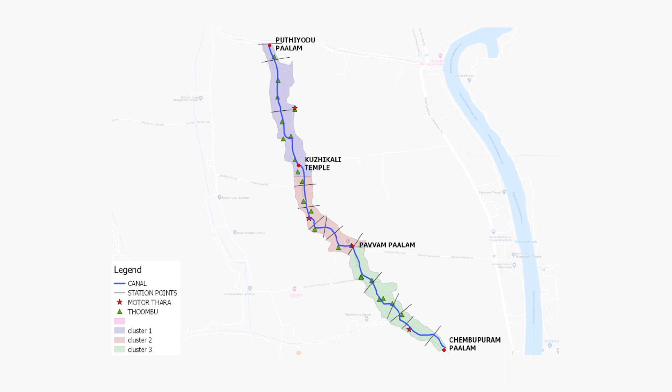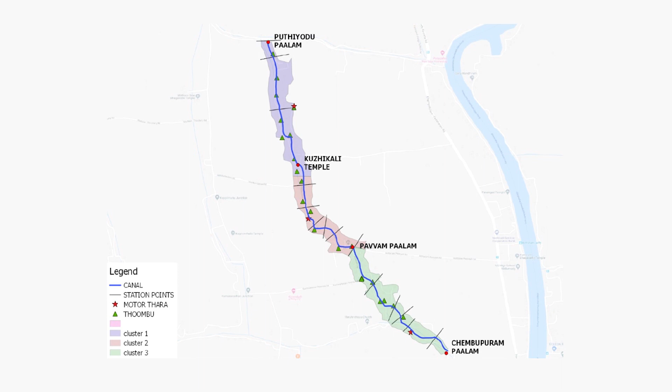So, we tried to clean a canal known as Pavvam Canal in Nirmadi Panchayat within a single day with people's participation, and then we tried to construct the compound wall surrounding the Kidake Thumbooram Padashekaram, which is of length 3.8 kilometers, using the debris, the clay, the deposits in the water bodies over there. So, those are case studies number 2 and 3, which are going to be discussed in this segment number 5. So, here we go.

First of all, we shall see the Pavvam Canal experiment. Pavvam Thoda or Pavvam Canal is a canal having a length of 2.5 kilometers, running through the Nirmadi Panchayat. It suffered from silting and encroachments. So, the canal is almost dead because of the silting. The flow of water through it is almost not there, and there were a lot of encroachments also.

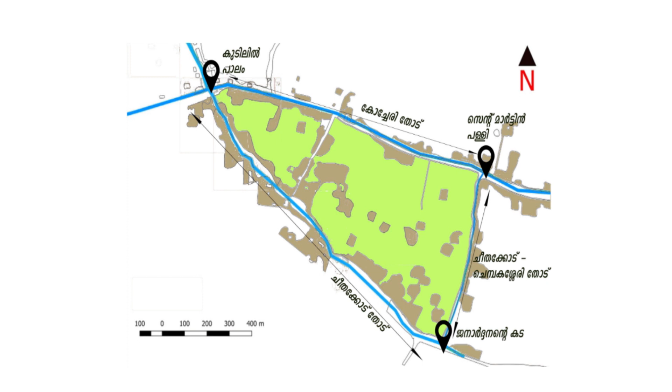You can see in green color the Padashekaram, the polders, the paddy fields, and surrounding the triangular polder you can see water bodies, shown in blue color in the diagram. In the water bodies there was silt deposit, somewhere the width of the water body was not sufficient, somewhere the flow was not there. So, a lot of problems were there. A lot of water weeds were there, so removal of water weeds was also an issue. So, a survey has been done in the water body surrounding this particular polder.

The measurements like width of the canal or the river, whatever is surrounding that, is taken. Depth of the water in the canals and depth of the siltation in the canal were also taken, following the methodology which was adopted in the Alappuzha Canal Rejuvenation Project.

So, this is exercised at every 25 meter interval; these measurements were taken, and the quantity of sludge to be removed was calculated, and this implementation has been handed over again to the irrigation department of the state. So, you can see the measurement, the numbers are given there.

135 acre was the extent of the paddy field of this Thumbooram Padashekaram. 3.5 kilometer was the length of the outer bund. 300 meters is the length of the inner bund. So, that is the quantity, and then the data collection process

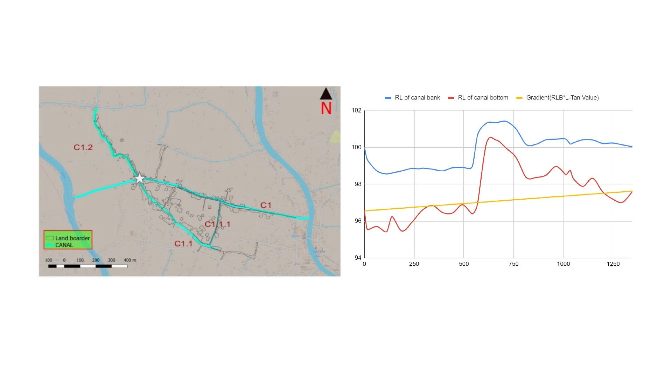So, this 3.3 lakhs cubic meter of sludge is made use of to strengthen the bunds. That is what is going to be discussed in the next slides. So, people participation was there, and community-driven agro enterprise also. So, these are all the associated aims of the project given there.

Now, how the Thumbooram project has been executed is what is being explained in these slides. Objectives: to collect soil samples and test for index properties of soil as well as CBR. So, these are some technical terms associated with civil engineering, because when you actually make a road or a foundation, for the soil below the foundation the index properties are required, like liquid limit, plastic limit, etc.

CBR is California bearing ratio, that is the full form of CBR. So, the CBR test is conducted in the laboratory using the disturbed soil collected from the site, and a higher value CBR indicates that the soil is good, a lower value CBR indicates that the soil is bad. So, that is how it can be interpreted.

So, what we have done is we have collected the samples from the site, and whatever soil is available from the site was tested for CBR, and we got a very low value for sure. And then we added coir geotextiles into that in a single layer and multiple layers, and then the CBR test was done again, and the result is given in the coming slides in detail.

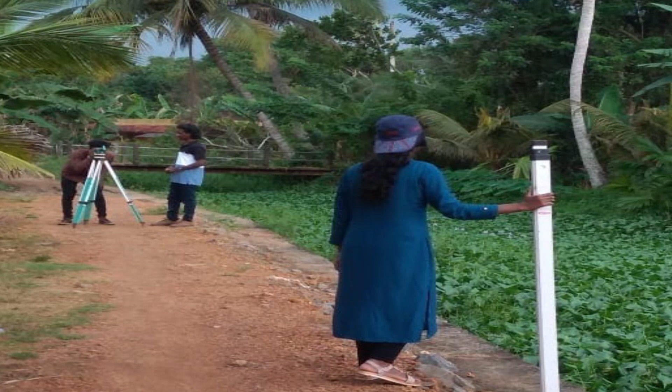So, from the data of the survey and the test results, to design suitable pavement using silt, clay and coir geotextiles based on gradation, based on density of the geotextiles and based on the CBR value. So, a methodology has been devised after reinforcing the clay available from the site using coir geotextiles. That is what is being explained.

To strengthen the existing bunds through the devised methodology, geotextiles and Cocolog. Cocolog is a product which is produced by the NCRMI, Thiruvananthapuram. So, there is a Coir Research Institute in Thiruvananthapuram, they are producing this Cocolog also, and these coir geotextiles are products of the Coir Board. So, they are available in plenty, and coir is also a product of Alappuzha for sure. So, it will be a promotion for that too. So, the coir geotextiles as well as the Cocolog.

Cocolog is actually a bundled shape of this coir geotextile, I would say. Like in the shape of a cylinder, they bundle it, and these bundles could be inserted into the driven poles. In between the bund and the driven poles, the Cocolog is inserted firmly, and they help growing of vegetation. Finally, after some time, after say 2 years or 3 years or 4 years, this Cocolog or the coir geotextile may peel off from the place, but the vegetation will grow there, and the roots of the vegetation will keep the soil firmly. That is a fine line, right.

So, after taking all those measurements and after conducting all those tests, the result is this. From the experimental results, it was observed that there was 53% of silt in the sample which is tested, 18% of clay and 29% of soil having higher gradation. So, silt, clay and other gradation soil particles were there in that mix of soil. It was inferred that the strengthening can be effected through compaction, right.

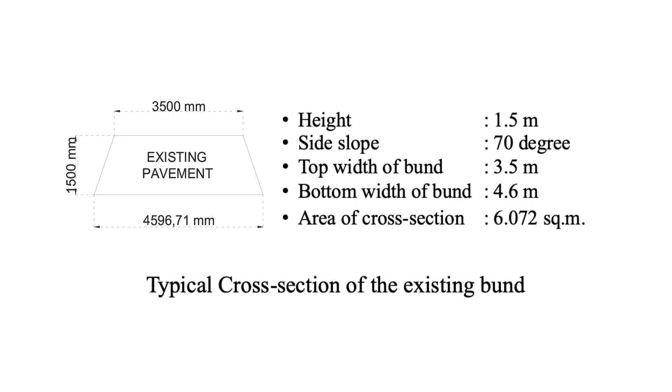And such kind of a typical existing bund is improvised in this manner. You can see the top width is maintained as 3.5 meters. The bottom width will increase because there is a side slope for sure. And coir geotextiles are going to be made use of to improvise this, and that is going to be explained in the coming slides onwards. So, if the bund which you see in the previous slide is to be improved, the improved bund looks like this.

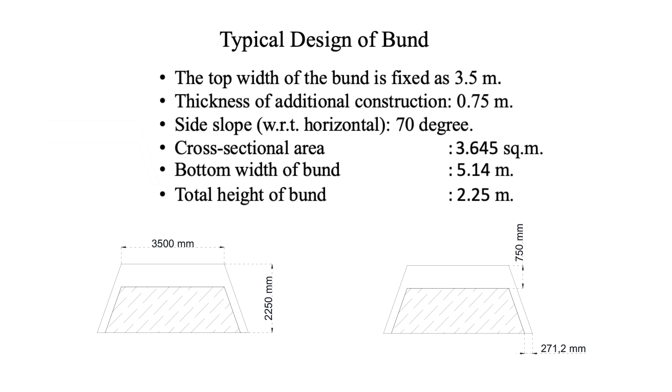The top width is 3.5 meters, thickness of additional clay is 0.75 meters or 75 centimeters. Then side slope with respect to the horizontal is 70 degrees. Cross sectional area is improving to 3.645 square meters. The bottom width of bund is increasing to 5.14 meters from 4 point something. Then total height of the bund is increasing to 2.25. This is only a typical example. So, depending upon the existing bund, there is modification to this kind of a design. So, this has been proposed as a typical design, and after sufficient modification, that is accepted in other places also.

So, this is how the reinforcement is being done. The cross section of bunds strengthened by coir geotextiles: you can see that the colored portion in the figure is the existing bund. Covering that, we place a geotextile layer, and that geotextile layer extends to the side walls also. So, the side wall is protected just like that, and then along the side walls we add more clay, so that

sufficient width is maintained. And then covering that, another layer of geotextile is going to be placed on the side walls only. It is going to be explained in detail in the figures in the coming slides, but still I am just trying to explain. A third layer of geotextile is going to be placed on top of that layer of geotextiles, and that is going to be taken to the top and ballooned. The ballooning process is going to be explained in detail in the coming slides.

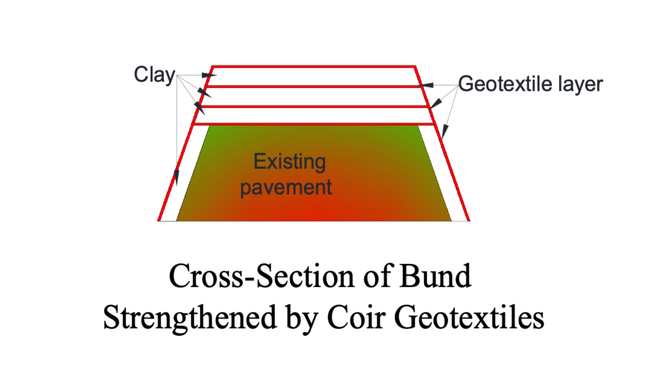Now, we can see three white layers of clay shown in the figure. The clay layers are laid one after the other. After laying the first layer of geotextile on the original surface, we put a layer of clay having a thickness of 25 centimeters. That is rammed using natural rammers available there. So, water will go off and it will undergo some amount of compaction, and then a second layer of geotextile is placed above that as a reinforcement. As you can see, the red colored line represents the geotextile layer.

When the geotextile layer is placed, it is placed so that the geotextile is in a tensioned state. Nothing is in a slackened state. So, the geotextile will be in a tensioned state, and above that a second layer of clay of 25 centimeters thickness will be placed and rammed further, so that the net height is 50 centimeters. Then another reinforcement geotextile layer is placed, and a third final layer of clay is placed and rammed, and the geotextile which is laid on the original bund is ballooned up, it is folded up.

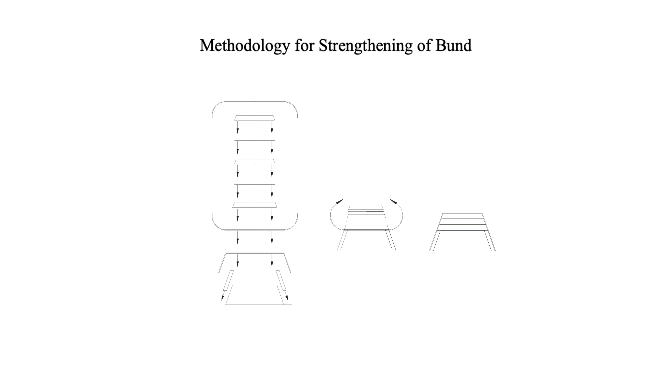You can see from some photographs how this is done precisely. So, it is taken to the top and stitched on the top in a tensioned state. It is not going to be in a slack state. So, this is what is done precisely. Layer by layer is shown in the figures, as you can see there.

In the figure on the left, we observe that on the bottom you can see a trapezoidal shaped original bund. On top of that you can see a layer of geotextile which is going to be placed on the original layer, and then soil is going to be placed on the side of that, and then a ballooning geotextile layer is placed just above that. You can see an upward curved geotextile layer.

Then above that there is a layer of clay, then above that there is a layer of geotextile which is horizontally placed. Above that a second layer of clay, then above that a layer of geotextile which is again a reinforcing layer, and above that the last layer, and the ballooned geotextile from the bottom is taken to the top. What you see on the top is the part of the geotextile from the bottom itself, that is ballooned up and stitched on the top tightly. That is how it is going to be done, and it was successful. So the methodology is explained in detail over here.

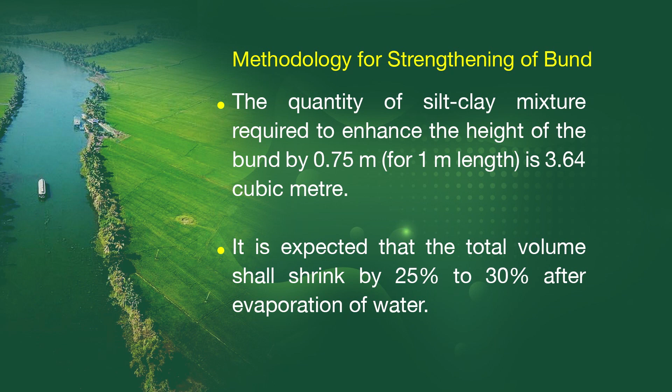The quantity of silt clay mixture required to enhance the height of the bund by 0.75 meters for 1 meter length was 3.64 cubic meters. That is a kind of quantification. So you can find out the quantity required for say 1 kilometer or 3.85 kilometers, just like that. It is expected from experiments that the total volume shall shrink by 25% to 30% after evaporation of water. That is why finally we require a total height of at least 60 centimeters. So we put the rammed layers of clay in such a fashion that the total thickness is 75 centimeters, and finally after draining of water the thickness becomes 60 centimeters.

Based on the test results of California Bearing Ratio or CBR and IRC code, Indian Roads Congress Code 37 2001, the thickness of the pavement required for 45 to 150 vehicles per day, the least number of vehicles, is 0.6 meters. That is how the number 0.6 was arrived at. So we assume that the clay which is placed above the original bund is like a pavement. So it is designed like a pavement only, according to the IRC code for road design.

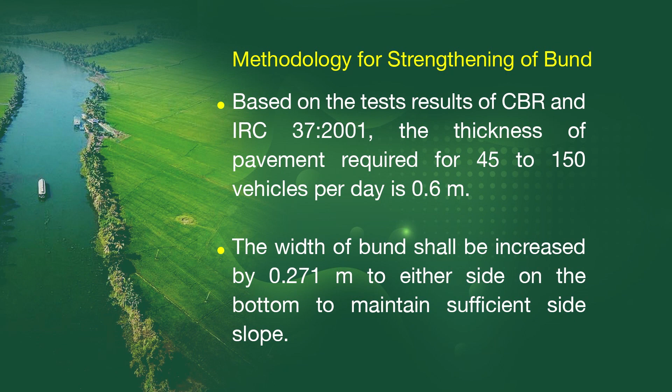The number of vehicles is not going to be 45 to 150 vehicles per day for sure, but the vehicles of the local people could now run through that road. The width of the bund shall be increased by 0.271 meters to either side on the bottom to maintain sufficient side slope. So this is also a typical figure. That figure may change depending upon the original bund over there.

Further, continuing with the methodology for strengthening the bund, coir geotextile of 10 meter length. So this is how we find out the final methodology and give it to the workers over there. So coir geotextile of length 10 meters and width 2 meters is cut in that particular dimension and laid along the width of the bund to reinforce protection of the

existing bund. That is the first layer, and then after adding soil to the sides of the bund to ensure adequate bottom width and side slope, the coir geotextiles shall be anchored to the bottom of the canals and paddy fields using bamboo nails. That is very familiar to the MNREGA workers over there, and they will be doing it very nicely. But the ballooning process, reinforcement process, those were not familiar to them. So we have to actually teach them to do this.

Then another layer of coir geotextiles shall be laid on top of the first layer of almost the same dimension, say 10 meters of length and 2 meters of width, to cover and protect the additional layer of silt and clay on the top. Silt clay mixture which is dried for 24 hours shall be laid to a thickness of 25 centimeters and compacted.

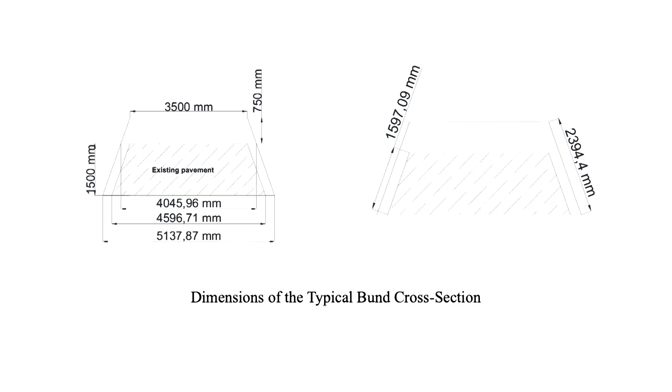And further, the coir geotextiles which were laid below shall now be raised to the top of the bund to balloon the layers of silt clay filling and tightly anchored using bamboo nails on top. The side slope shall be maintained at 70 degrees. Now, finally, a 15 centimeter thick layer of gravel can be placed above this to facilitate traffic later. Again it has been explained through the figures, dimensions of the typical bund cross section.

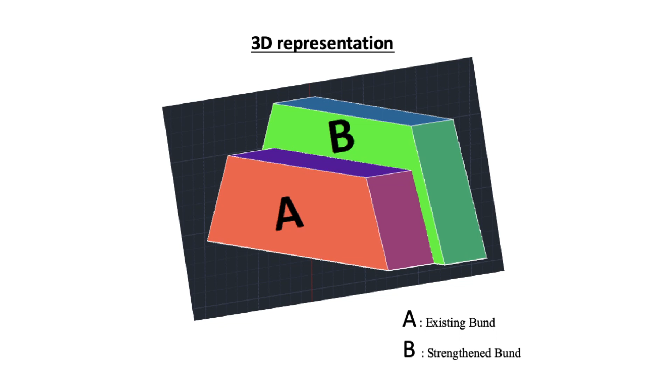So, these are some numbers which you can go through in detail. This is already explained in the previous slides. You can see a 3-dimensional picture just to explain to the workers that A will be just like your original bund, and B is the additional thing which you are doing. So, the dimensions are pretty clear using this particular figure. You can see the execution of this.

In fact, this started on 8th of February 2020, and after that the lockdown came into existence. So, we could not complete it in time because of restrictions from the lockdown. But later, after several months, it has been completed and now it is open to public. So, this is the experiment done in the Powam Canal as well as in the Thumbooram polder.